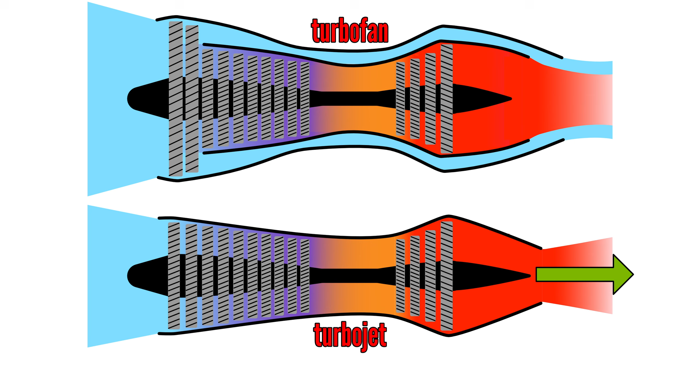These aren't true turbojets. Unlike turbojets, they do not create all thrust with the engine core - a meaningful portion is also generated by a fan or a set of fans. Just one example is the F-111 Aardvark's Pratt & Whitney TF30 turbofans, where clearly some air bypasses the engine core and doesn't get combusted at all.

In airliners, the turbojet essentially died out for new designs in the 1950s, with supersonic jets like the Concorde being exceptions from the late 1960s. The main reason turbojets were made obsolete barely two decades after it first entered mass production is because turbojets are extremely fuel inefficient, even for military applications. The turbofan offers some real advantages over them, like being quieter, which matters for civilian use, offering better static thrust and thus better takeoff performance, as well as being efficient at lower speeds.

I'm digressing a bit, but I wanted to create the necessary context to highlight how exceptionally strange it is to have turbojets on the market for small manned aircraft.

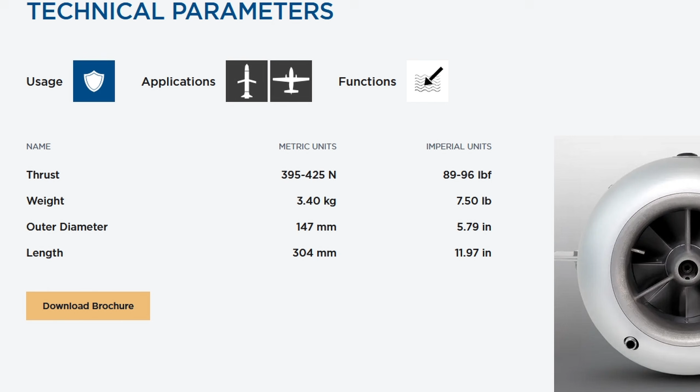PBS Velká Bíteš is a Czech turbine engine manufacturer. They produce the TP100 turboprop and a range of small turbojets, the smallest currently in production being the TJ40G1, which is just 147mm in diameter and 304mm long, weighing 3.4 kilograms - that's 7.5 pounds. While most of these small turbojets PBS offers are targeted at powering unmanned aerial vehicles and missiles, there is one variant also targeted at experimental aviation, the TJ100.

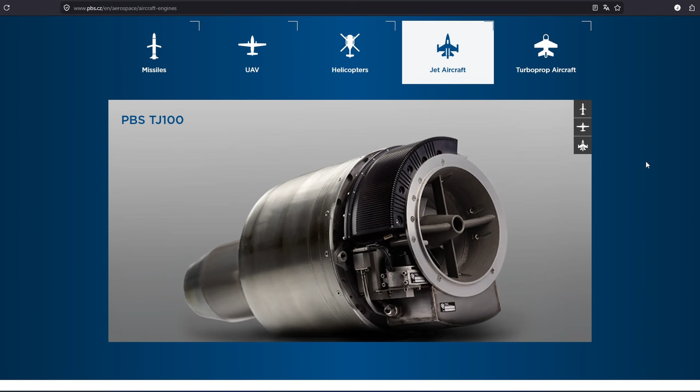It has a diameter of 272mm and is 636mm long with a weight of only 17.6 kilograms. The engine has a maximum operating speed of Mach 0.9 and a maximum altitude of over 32,000 feet. Specific fuel consumption is 0.118 kg per Newton hour, which translates to around 184 liters per hour. That's clearly not fuel efficient, but note that this is at full thrust at sea level and consumption will come down as power is reduced in cruise.

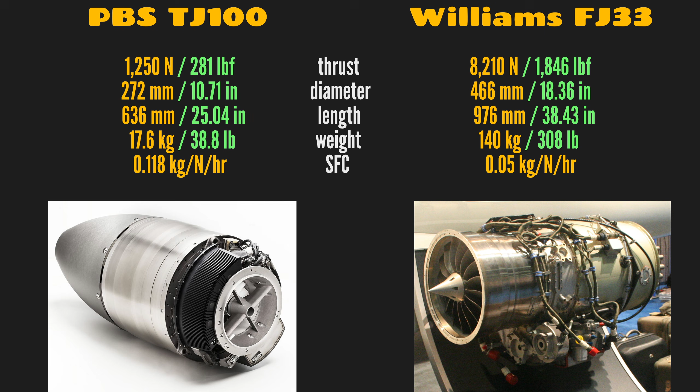It produces up to 1,250 newtons of thrust at sea level. But how much is that really? Well, the small Williams FJ33, which powers the Cirrus Vision Jet, produces 8,200 newtons. Keep in mind the FJ33 is a turbofan, not a turbojet - I'm only citing it for reference as it's a relatively well-known small turbine engine.

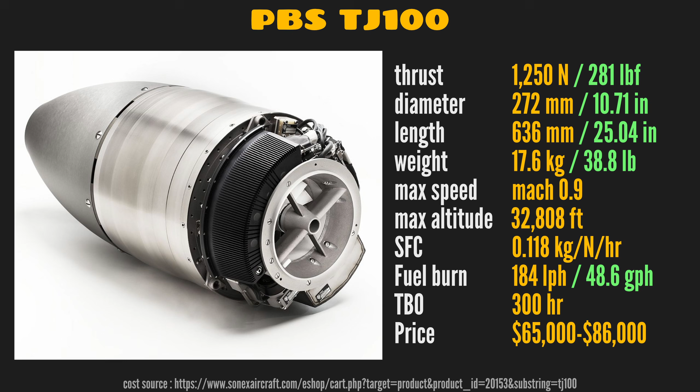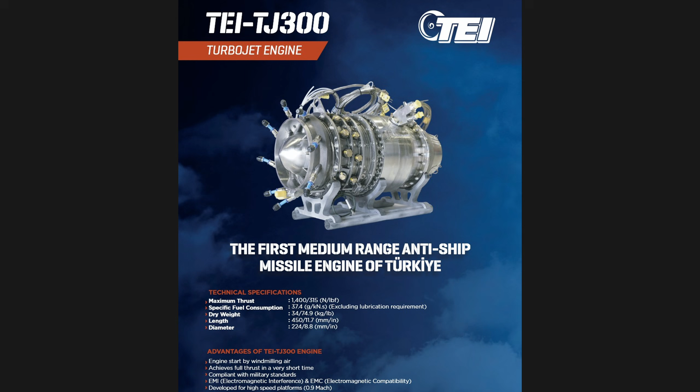The TJ100 has a TBO of 300 hours for the latest variant. The only references I could find to its cost put it between $65,000 and $86,000, so not exactly cheap. So how does the TJ100 compare to other small turbojet engines? There is the TEI TJ300, which produces a comparable 1,400 Newton, but unlike the PBS, it is strictly marketed as a missile engine. If our criteria is that a turbojet must be officially targeted at manned experimental jets to be considered here, it leaves almost nothing else on the list.

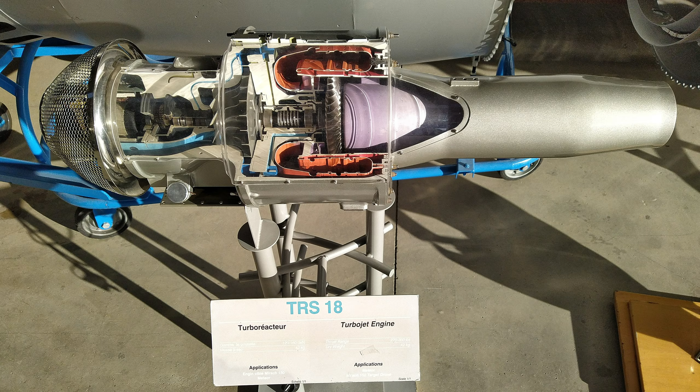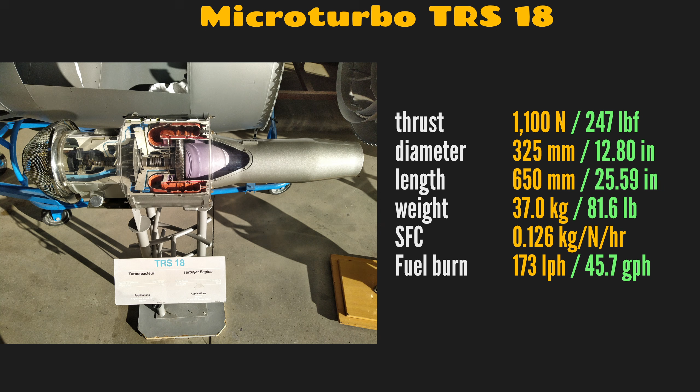One older engine that does qualify is the Microturbo TRS-18, a small French turbojet from the 1970s. It produces a maximum of around 1,100 Newtons for takeoff, has similar dimensions to the TJ100, but is about twice as heavy. The lack of small turbojet options is no real mystery — they are very fuel inefficient and very expensive. Still, I doubt there's a cheaper way to power a plane capable of over 250 knots than a small turbojet.

Before we look at applications, let's first look at the design of small turbojets. Turbojets are fairly simple in design, and scaled down they become simpler still. We'll consider the TJ100, but all these small turbojets share a similar basic design.

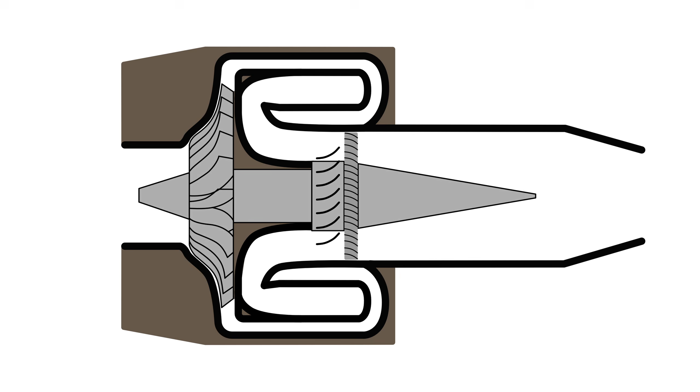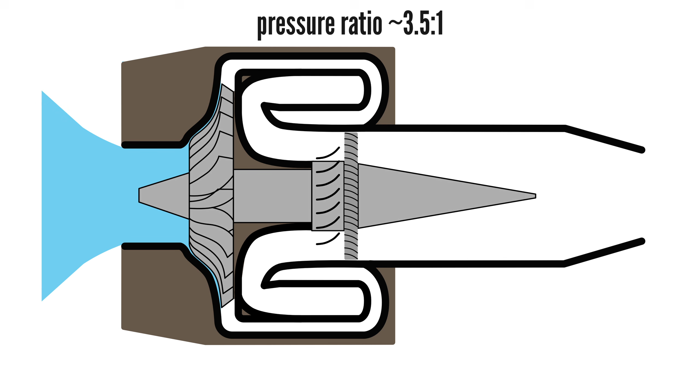Air enters at the front into the centrifugal compressor, which takes air in axially, then moves compressed air out radially in all directions — that's why it's also called a radial compressor. It only has a single compression stage with a pressure ratio of around 3.5 to 1, though that's an estimate, as PBS doesn't disclose that information.

Because of how compressed air is accelerated radially, the airflow needs to be turned 90 degrees rearward to feed the combustion chamber. Keep in mind this flows rearward right around the engine — the compressed air can flow all the way around to enter the combustion chamber. It first passes through a diffuser, which increases static pressure and lowers air velocity, important to avoid flameouts.

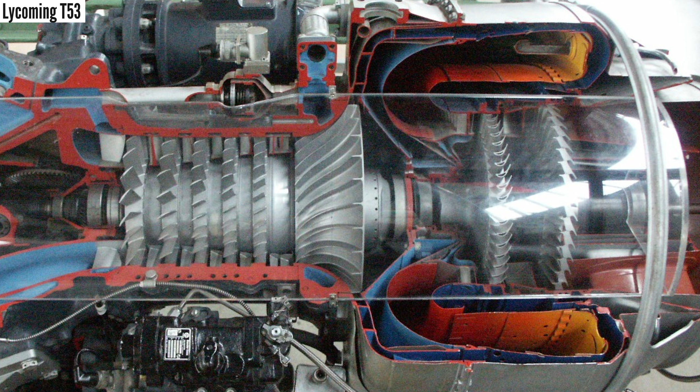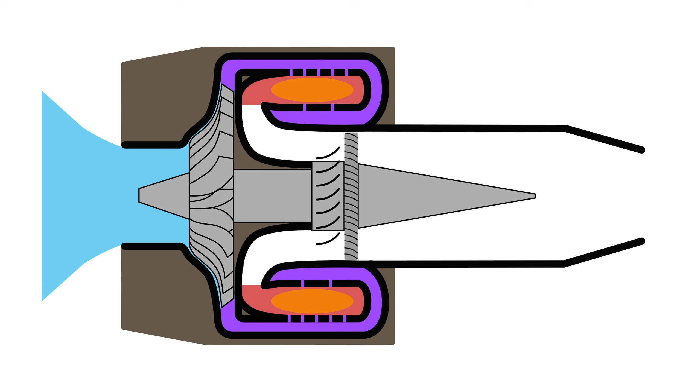The combustion chamber is of annular type, which you can think of as a ring running 360 degrees around the circumference of the turbine section. Fuel is added and the mixture of compressed air and fuel is ignited. The hot expanding gases then flow out through the nozzle guide vanes, which redirect them to meet the turbine blades at the optimum angle. As the hot expanding gas exits through the turbine blades, it spins the turbine, and the gases then flow through the exhaust nozzle, converting pressure into kinetic energy, which creates thrust.

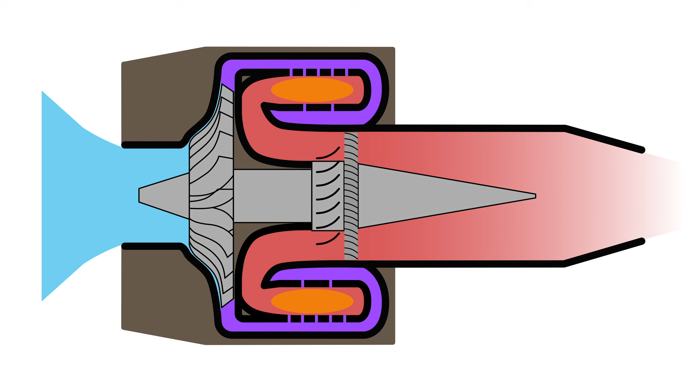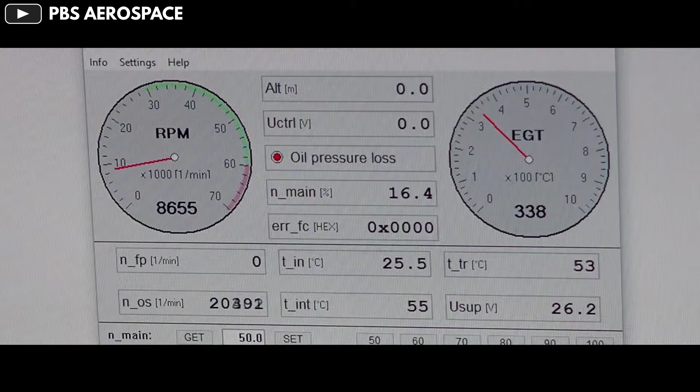The turbine is directly connected to the compressor, so the turbine rotor spins the compressor, which keeps feeding the engine with compressed air to combust. The TJ100 is a single shaft engine, so everything in the engine core that spins does so at the same speed, as they're all connected to the same shaft. Maximum engine RPM is 60,600.

And that's it — extremely simple and quite possibly the production engine for human-carrying aircraft with the fewest moving parts. Unfortunately, this low moving parts count does nothing for fuel efficiency.

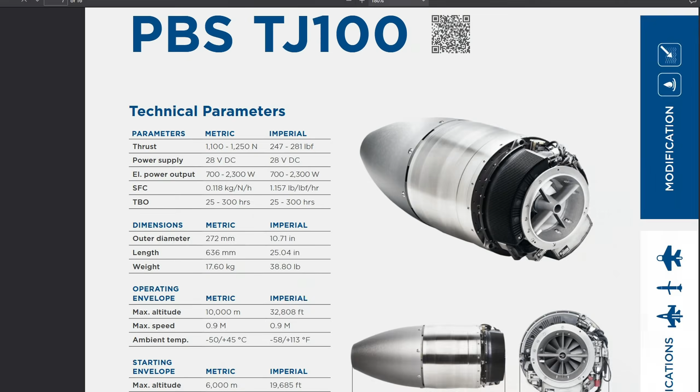Fuel consumption runs at about 184 liters per hour at full thrust at sea level, a figure derived from the specific fuel consumption stated on the PBS website. But this comes down to a claimed number of 68 liters per hour in cruise at altitude in at least one of its applications.

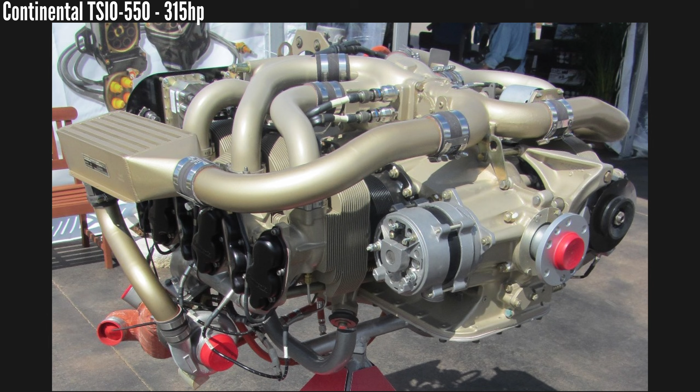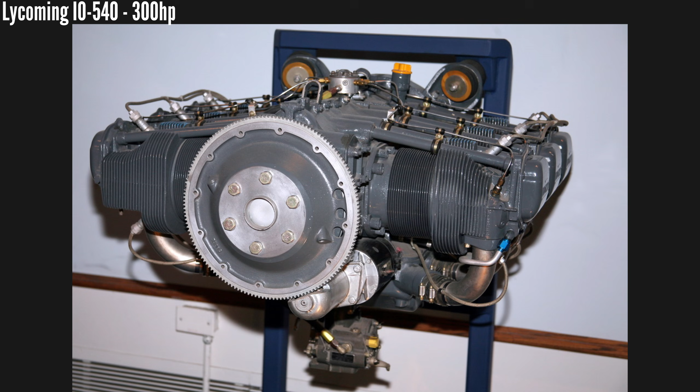To illustrate how inefficient these engines are, for comparison, here are a few light aircraft piston engines with similar fuel consumption. The 315 horsepower Continental TSIO-550 in the Cirrus SR22T burns around 62 liters per hour in cruise. And Lycoming's 300 horsepower IO-540 in a Cherokee 6 burns around 60 liters per hour. Fuel burn for both examples can vary a bit.

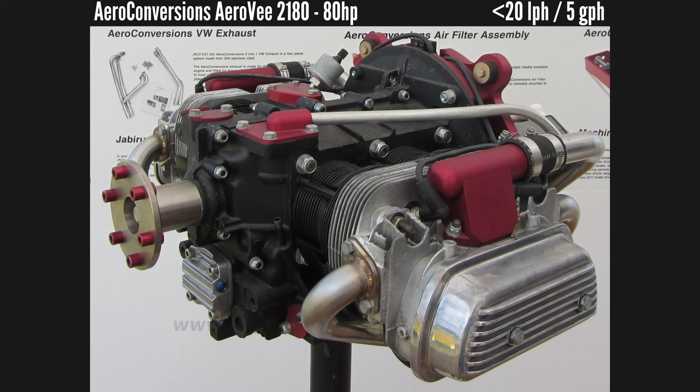These engines don't really compare well with the TJ100 though, as they power significantly larger 4- and 6-seat aircraft, which the TJ100 cannot. A more comparable piston engine would be something like the 80 horsepower AeroVee, which uses less than 20 liters per hour.

Sure, throttling the turbojet back lowers fuel burn per hour, but this actually worsens specific fuel consumption. This is because turbojets are designed around a specific operating point, near full power. As the engine is throttled back, compressor RPM falls, pressure ratio drops, and turbine inlet temperature drops, all of which reduce thermodynamic efficiency. So, when throttling back, turbojet thrust falls disproportionately to fuel flow, unlike piston engines, for which specific fuel consumption stays constant or even improves at lower power settings.

But the main reason a small turbojet consumes almost 4 times more fuel than a roughly comparable piston engine is only partially due to being a turbojet, but mostly due to being a small turbojet.

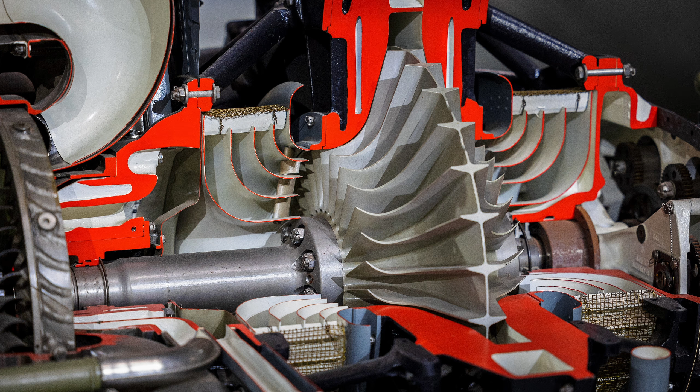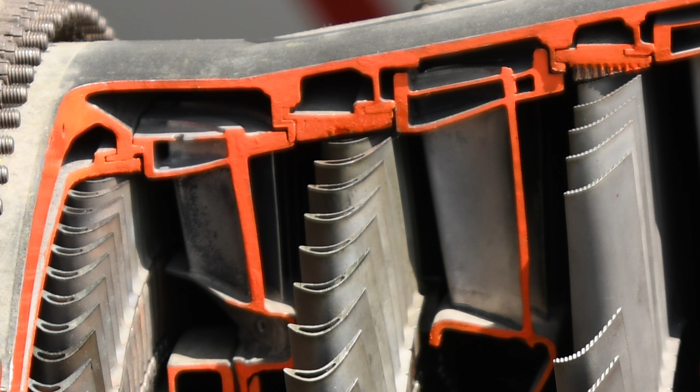Gas turbine engines don't scale down well and lose considerable propulsive and thermal efficiency when made smaller, compared to piston engines made smaller. This is primarily due to compressor and turbine blade tip clearances. On a large turbojet, or turbofan engines for that matter, the gap between the blade tips and the surrounding shroud is kept very tight. It has to be because efficiency is lost whenever air passes uncompressed past the compressor or turbine blades without doing work. The larger the clearances, the more efficiency is lost. Gas turbines therefore maintain a very low tip clearance to blade height ratio.

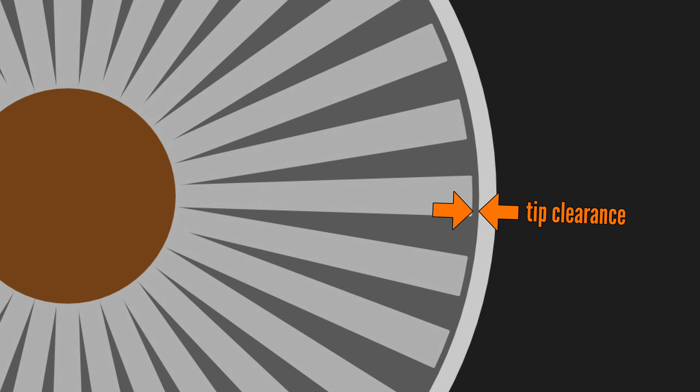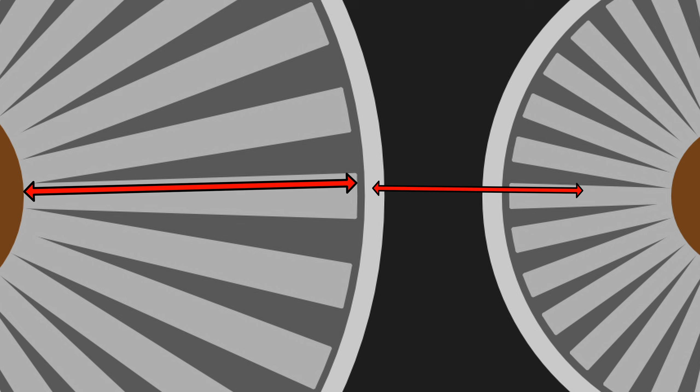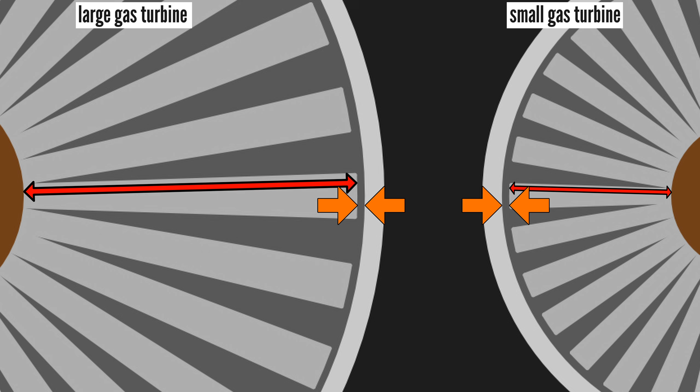But as we make smaller gas turbines, that clearance does not shrink proportionally. Halving the length of a turbine blade to build a smaller engine does not mean the tip clearance can be halved as well, due to manufacturing tolerances. That means the smaller the engine, the larger the tip clearance relative to blade height. Relatively speaking, too much air is lost through the gaps and engine efficiency suffers accordingly. So it's no wonder small gas turbine engines haven't taken over for very light aircraft, let alone small turbojets.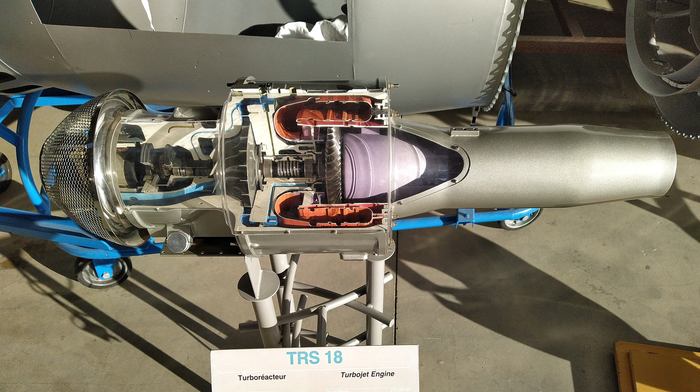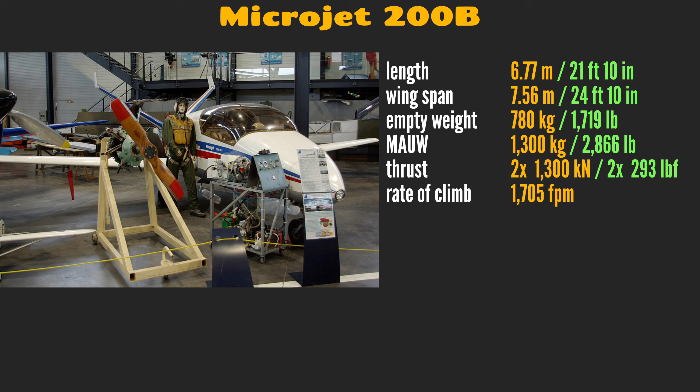The TRS-18 from Microturbo was the power plant of choice for the Microjet 200, a French light jet trainer which first flew in 1980. It's not as tiny as you might expect, at 6.7 meters long with an 8 meter wingspan. Empty weight was 780 kilograms, again using the Cirrus SF50 as reference, which has an empty weight of about 1,600 kilograms. With a max all-up weight of 1,300 kilograms, it makes sense that it needed 2 TRS-18s, which together gave it a 1,700 feet per minute rate of climb. Cruise speed was 209 knots, with a maximum speed of 249 knots and a ceiling of 30,000 feet.

Only a handful of Microjet 200s were built. Keeping with the TRS-18, it also powered a few other jets built in small numbers, the most interesting being NASA's AD-1 oblique wing research aircraft.

While these are small jets, they aren't personal jets that a private pilot could realistically own. So let's look at some that are.

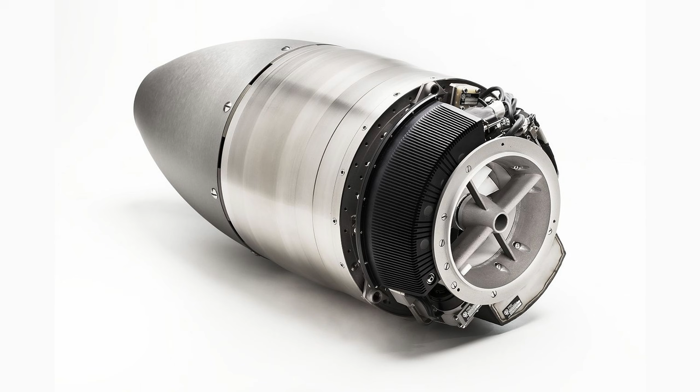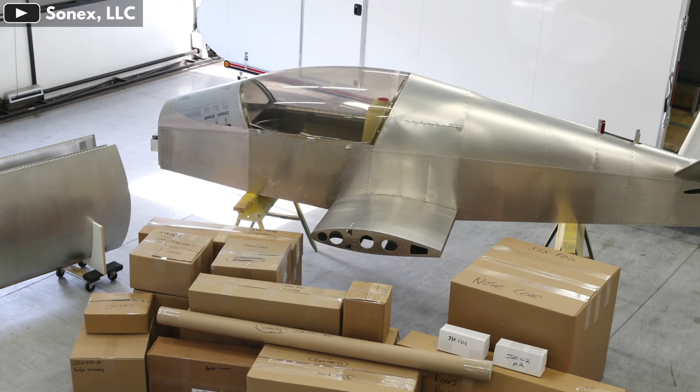The TJ100 from PBS has powered mainly 2 types of experimental jet, the BD-5J Micro and the Sonex JSX-2. The latter is a home-built single-seat jet from Sonex Aircraft. At least 17 have been built, so it's not a one-off type. It's also fairly modern, having been introduced in 2015. It's 5 meters long with a 5.5 meter wingspan.

Empty weight is around 230 kilograms, with a max all-up weight of 454 kilograms. It cruises at around 210 knots with a never exceed speed of 249 knots. Rate of climb is a respectable 1,600 feet per minute, and fuel consumption is claimed to be 68 liters per hour in the cruise.

The other TJ100 powered personal jet is also a home-built, the BD-5J Micro. If it looks a little familiar, that might reveal your age, as the BD-5J appeared in the 1983 film Octopussy, being flown by Roger Moore's James Bond in the opening scenes of the film.

Note that the performance figures I'll use here are for the TRS-18 powered version, as I couldn't find a complete set of figures for the TJ100 powered variant. It's only 3.8 meters long with a 5.2 meter wingspan. Empty weight is just 195 kilograms and max takeoff weight is 408 kilograms. Maximum level speed is 288 knots, or 330 miles per hour at sea level. Rate of climb is an impressive 2,400 feet per minute, and service ceiling is an equally impressive 30,000 feet.

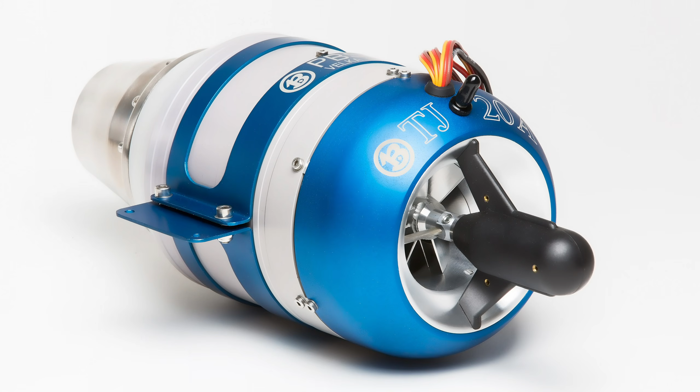If that sounds crazy, the prototype flew with two 9 horsepower engines. The jet variant is powered by two PBS TJ20s, which are no longer listed on the website, which I assume is because it's no longer in production. Each TJ20A is 316 mm long, weighs about 2.1 kilograms, produces a maximum of 210 newtons of thrust, and can operate up to around 20,000 feet.

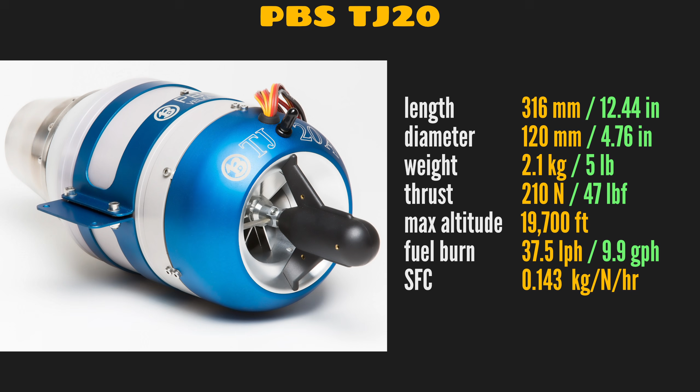The TJ20 sprints up to a maximum of 120,000 RPM. The Cri-Cri jet is only 3.9 meters long with a 5.3 meter wingspan. Empty weight is just 83 kilograms with a max all-up weight of 205 kilograms. At full throttle, it burns up to 78 liters per hour. Rate of climb is 1,180 feet per minute and maximum level speed is 119 knots, with a never exceed speed of 140 knots.

The biggest issue with using a small piston engine in a powered sailplane is stowing the propeller blades. Some sailplanes do this successfully, but there is always some sort of compromise in the propeller design to allow it to fold away. That challenge is apparent when you consider that single-blade propellers are actually a thing in powered sailplanes, precisely because they ease stowing. I've already talked about single-blade propellers in a dedicated video linked in the description.

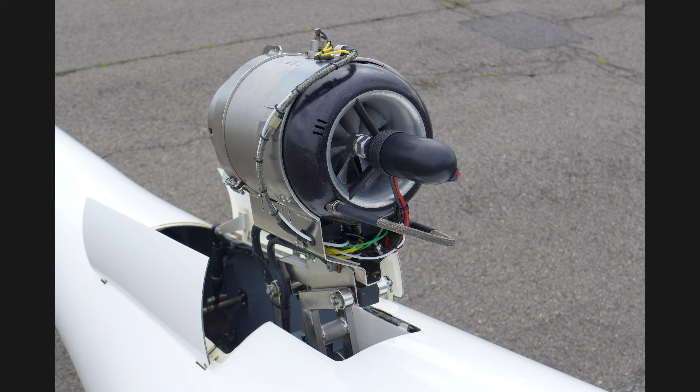A turbojet has no propeller blades at all and is very small, which makes the stowing problem largely disappear and greatly simplifies the installation design. Of course, there's the issue of high fuel consumption, but sailplanes aren't using the engine continuously throughout a flight, only occasionally, and on some flights not at all. That makes the turbojet's thirst much less of a problem.

Having seen one of these fly an airshow routine, they do seem extremely capable and fun, though obviously not their primary purpose.

Beautiful aircraft, beautiful display, flown here by a man that's got the title of World Champion many times.

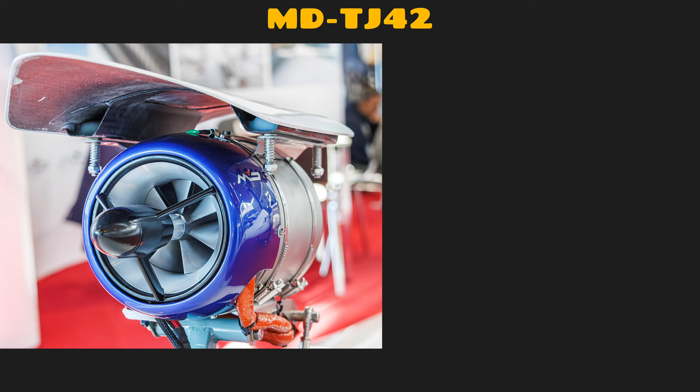One example is the JS series of sailplanes from South African manufacturer Jonker, which uses the MD TJ42 turbojet, an engine designed specifically as a sailplane sustainer. It produces 350 newtons of thrust. Dry weight is only 3.65 kg or 8 pounds, and at just 406 mm long with 148 mm cross section, it's easy to see why it suits sailplanes so well.

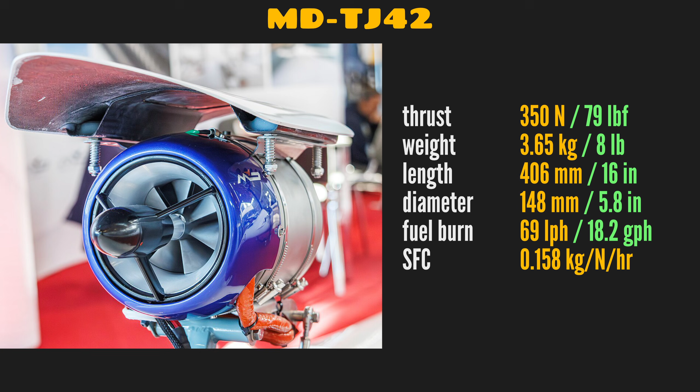Fuel consumption is claimed to be around 69 liters per hour at maximum thrust, but running on power for extended periods is not something that happens often in this kind of flying.

This isn't an exhaustive list. There are a few more sailplanes making use of turbojets. As I wanted to focus on manned applications, I didn't cover drones, and missiles aren't really my thing.